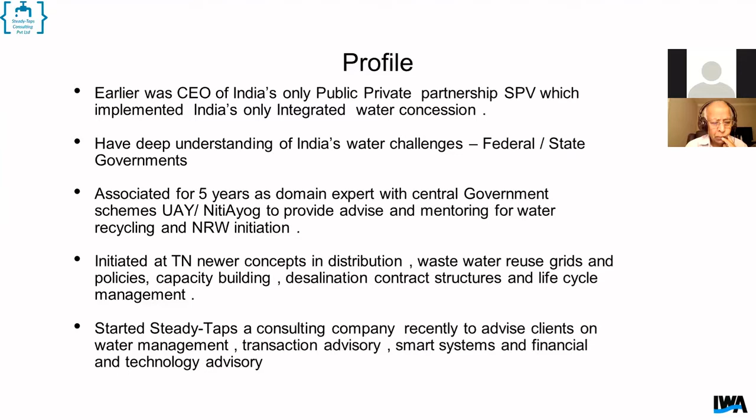I retired in the first week of July, and I've started my own small outfit, consulting with a few people. Especially, I consult with the Government of Orissa for all their reforms, and I work closely with them. Except that COVID has taken a dent on travel, they are marching towards continuous water supply, and it will be one of the first states to achieve it. I'm very actively involved with it.

The discussion points I want to put forward to the audience today: I want to talk about the challenges in India, the new initiatives of the federal government, that is the central government. I'm also part of some subcommittees, and I've been with NITI Aayog and UAY for the past 5 years, representing through IIT Madras the program on wastewater and air pollution. What has been India's experience over the last few years?

Key strategies and some case studies I'll be putting forward, from some of the projects I have been involved with right from the beginning, over the last 20 years. And how to bring in smart water technologies and new contract structures.

If you really see, sir, there is a real pressure today from the external environment on water supply. All of you agree to it. Today, quality and reliability has become a very big question mark. I'm not picking any states, but generally, sustainability is a problem. We are not having enough finance to take care of our future growth, conservation, cost effectiveness, and the social demands. The NGOs and other people have become so strong that they are all demanding.

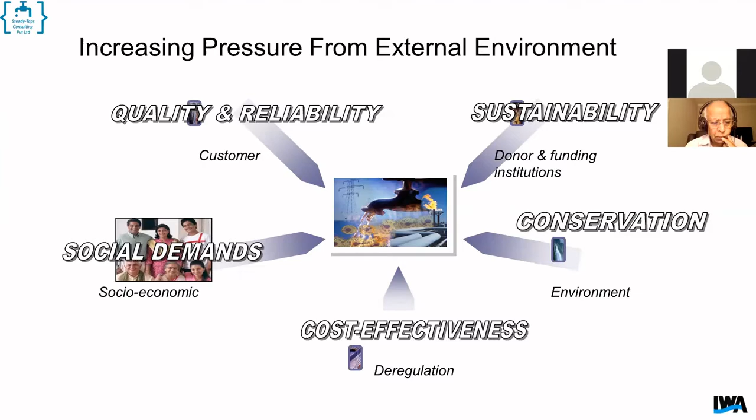So today the need of good city management is to really give 100% coverage of both quantity and quality of water supply, as per WHO standards, incorporating any of the water sources, like for example it could be ground or surface water. In the case of Chennai, it could be desalination or even recycled water, blended water also - it's possible.

In any part of the world, nobody understands that India is giving an average of 2 hours of water per day. It's all 24/7 at the consumer end elsewhere, and introduction of demand management measures, primarily through metering and other pressure reducing devices and things like that. And reuse of tertiary water for industrial and commercial parks and things like that.

In terms of sewerage, 100% collection and treatment is what is envisaged as per the MOUD guidelines, and automation of the pumping stations and other things. And of course ICT, what you call information and communication technology, has become very, very important. That is coming in as the bridge which will integrate the technical planning and the commercial function to give a holistic solution. And this is the purpose of any city management.

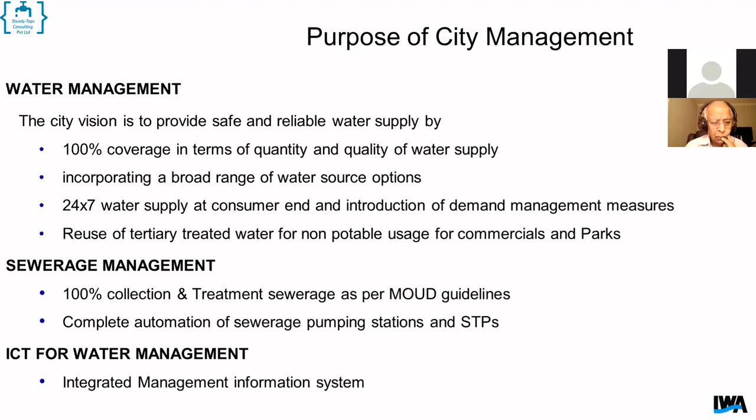Unfortunately in India, every city of ours, the 100 large cities or 100 smart cities, are very, very far away from it. So if you really see the utility perspective, water distribution is not equitable. I think all of us, whether in Chennai or any part of India, have this problem. Bulk water production assets have outlived their age. Distribution infrastructure is very old.

We take a backseat with regard to this oversized network. We are very keen to put very high capex assets by putting a water treatment plant for taking the capacity for the next 100 years, for the ultimate period, or even 40 years to the ultimate period, but we don't attend to the distribution lines - oversized networks, facilitating entry of sewer into the distribution system.

Our sewer network runs below the water networks, and very often there is penetration of sewer due to the air gap which is found. And because of the intermittent supply that we do, it is like sucking the sewer water and poisoning the system very often in many of the cities.

Less than 5% of the Indian system is metered today. And NRW - non-revenue water - I'll come to it later, is unknown. Everybody talks, everybody publishes on websites, they say I'm at 30%, 25%. CPHEEO norm says 15%, but no one is anywhere close to it.

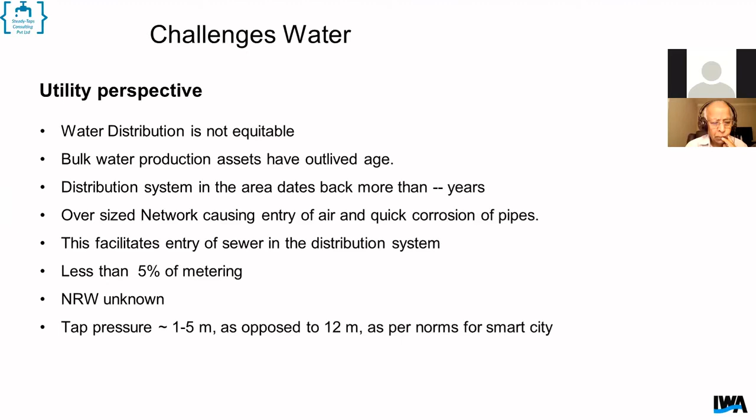From the consumer perspective, people know that they get only 2 to 5 hours of water. They in fact store the water. Due to inadequate water pressure, people resort to hand pumps, boosting the water, stealing it from the neighbors and things like that. Very many cities in India do that.

And the old water concept prevails. Whatever they store today, they are not sure whether the water is going to come next day. And when the water comes, they throw the old water out, and that is also NRW. And very badly, water contamination, especially due to rusted pipes and leaking joints, is very high. Consumers today have lost confidence - all of us take only mineral water.

Even though municipalities, and I would say even the mineral water people, are no good in terms of supplying the quality of water, we are forced to it because of the perceptions that have been created. So this is something very, very important.

The critical perspectives are source constraints, large distribution zones. We have expanded our command areas in cities in a big way. Cities have expanded, cities have outgrown, they have all added up. Chennai, from 174 square kilometers, has now come up to about 426 square kilometers in the last 5 years. So the geographical area increases with the same resources, and it is very difficult to maintain the pressure at the tail ends. Leaks and bursts, old dilapidated conditions of the pipeline.

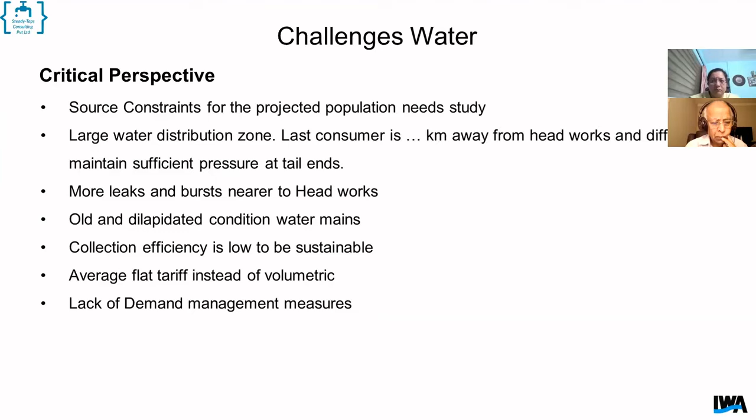Collection efficiency, I don't have to talk, it is very poor and not sustainable. Probably Tamil Nadu, Karnataka might have a better collection efficiency, but looking at the base of unmetered supply or unaccounted supply, it will be very, very large. So I would say the efficiency is extremely poor, average flat tariff and lack of demand management measures.

If you really see our legacy system, our baselines are very weak. Only now am I seeing a lot of smart young people coming from various engineering colleges, strong in the areas of GIS mapping, ability to understand technology and integrate them. Our records of baseline are extremely weak.

So we become very vulnerable, and we are always considered a high risk country because our baselines are never clear. Use of district metering, DMAs are never found, PRVs in very few places, and water audit or water balancing is almost non-existent. It's more than water audit - water balancing on a dynamic way is non-existent in our country. Per capita supply is low, poor pressures, and NRW is more than 50%.

I'll come to it shortly. And the cost recovery, all of us know. With the result, water supply is intermittent and inconsistent, tanker mafia in many cities, including capital cities like Delhi and Chennai, have all resorted to this.

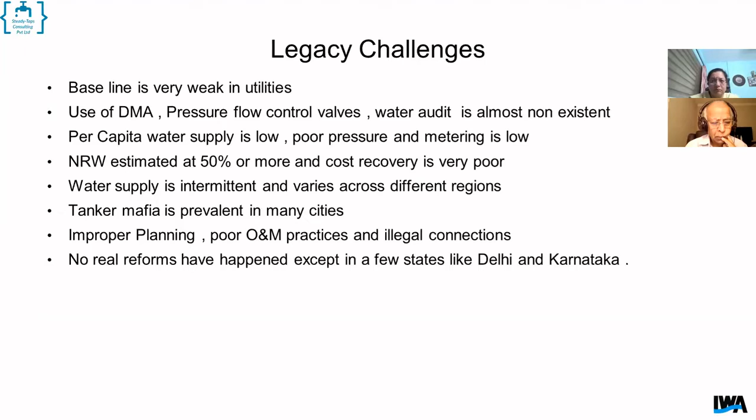Improper planning and poor O&M practice. No real reform has really happened in this sector. Only states like Karnataka and to some extent Delhi have done this, and every other state lags behind. Even many of our neighbors in Asian countries - especially Phnom Penh, Cambodia, Vietnam, even Sri Lanka - are far ahead of us in continuous water supply and NRW management.

So why am I saying this is very important, sir? We are coming close to the closure of our lockdown period in Tamil Nadu, but the challenges are going to be very high for our urban local bodies and government bodies, because it is very clear that clean supply of water is the front line of defense. The ubiquitous water supply is the front line of defense.

Hand washing - even today, you might not believe it, with so many sanitizers available, but all of us believe in disinfecting, washing our hands and feet even before we get into the house. That is very important, and we can't use stale water. Reliable piped water supply to consumers today is a prerequisite for social distancing and quarantine strategies.

Many people with COVID are staying inside today in many houses. In Chennai itself, I know so many friends who are COVID positive staying within their houses, not in hospitals. The prerequisite for them is reliable piped water supply. And the reliability and quality, whichever city in India, is still a problem.

Infrastructure spending post-pandemic will become very difficult. And like what Tamil Nadu has done, skilling and capacity building is going to be a very major thing. That is what I find - people like Dr. Nupur and others are doing so much work through TERI and other institutions in Delhi in terms of skilling and capacity building. This needs to be done at the distribution level also, sir.

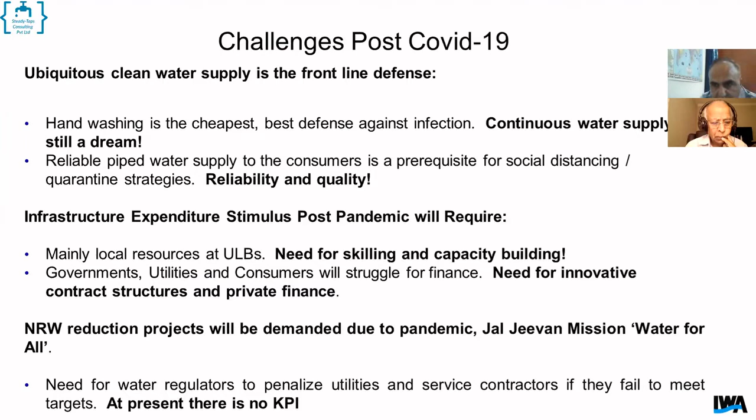The unique challenge in India, sir, is that we tend to operate our wastewater plants as water reclamation plants. We have learned this from the Singaporeans and others, and we are trying to build world-class systems on the wastewater side, especially after the new CPCB discharge norms. We are getting more modernized and talking this language of using wastewater as reclamation grounds or water factories. But we should also run our basic utility operations properly. That is actually the real bloodline for the citizens and for the utility themselves.

Today, unfortunately, utilities don't really exist as they should. The knowledge is there with the plumbers, fitters and linemen, but many have long retired, so we don't always know how current operations actually happen. Operating cost recovery is low, supply is often intermittent, and commercial and staff efficiency is also pretty low.

So if you really want to invest, if the World Bank wants to come and invest, it is very easy for them to fund a desal plant or a wastewater treatment plant. They are not able to invest in distribution, which is most important for our cities. Why not? Because asset condition is not known. There are no consultants able to deliver the quality of consultancy reports or DPRs that stand on their own, matching exactly what the asset condition is when the contractor comes in for construction.

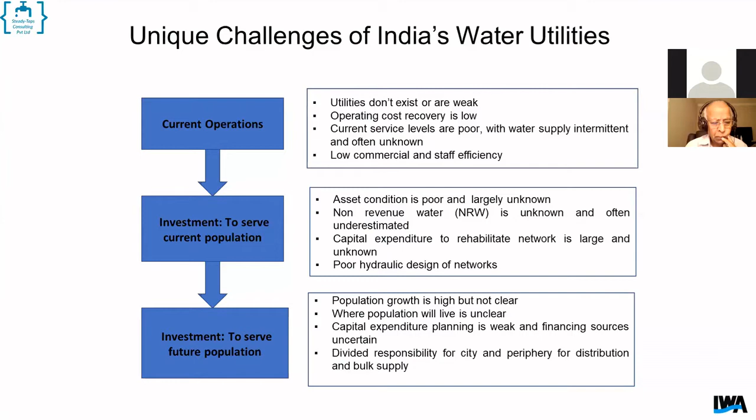Population growth is high, but it's not clear where the population will reside - whether in the ECR area of Tamil Nadu, Chennai, where there is no network right now, or in other newer areas north of Chennai. We do not know. Where the population will live is unclear. Capital expenditure planning is weak, and with divided responsibility, because cities have become so large and unviable, it has become very difficult.

So this is one of the things, whatever small, it's easy to handle.

We did a freewheeling thinking some time back, and a new guideline is expected to come. An apex level committee has been formed under CPHEEO, sir, just now, and they are coming out with this, wanting to bring in incentives also, I feel, so that they cover in the new Jal Jeevan for urban: 100% population and a piped water supply is the mission.

Just imagine, today we are just about 30 or 35% in our sewer system, whole country average. As such, we are having so much pollution issues, so much ingression into water networks of wastewater. Just imagine if we were to sewer the whole country, what will happen? If this type of poor workmanship happens, it will be a time bomb on us.

So we need to take a call now very clearly, and that is why pressurized piped water supply is very important. Quality up to WHO standards, and it should all be talked with respect to the individual houses or consumers, and conversion from intermittent supply to continuous supply, performance-based deliverables, and slightly long-term cost recovery.

Even in smart city, the government has given a ruling saying that when the central government gives the funds, within 5 years you have to be sustainable in your O&M. That means your tariff and efficiency of operation should be such that within 5 years, your solid waste or water network or O&M of anything should be paying for itself and sustaining and growing. That is why they provided the core capital. And we are today very far away from it.

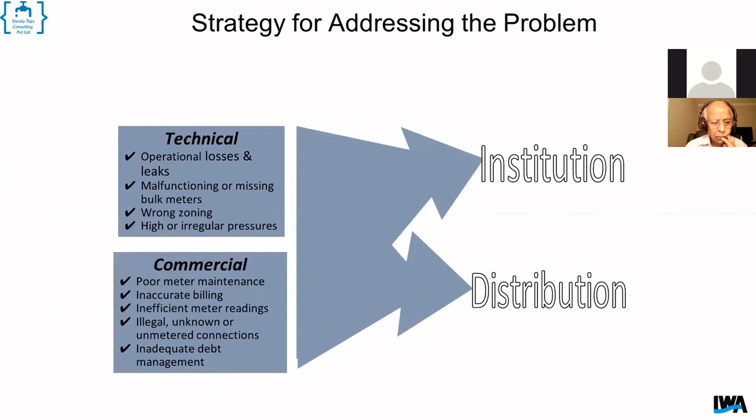Similarly, the main principle should be to provide sufficient, optimized, pressurized water. So we should have an appropriate legal and tariff framework. Consumer awareness is important - provision of billing, customer services, efficient O&M, institutional strengthening, state-of-the-art information technology.

Indians, we are very good in that, and we actually do most of these things for around the world. In fact, most of the London utilities' back offices are all managed by people like Wipro. Do you know that?

All the systems that are done, there are Swan systems, companies around the world with intelligent network systems, which are all manned by our IT companies in India, whether it's Infosys or Wipro, all doing it from Bangalore. Effective utility management, cost benefits, and sustainable methodology is very important.

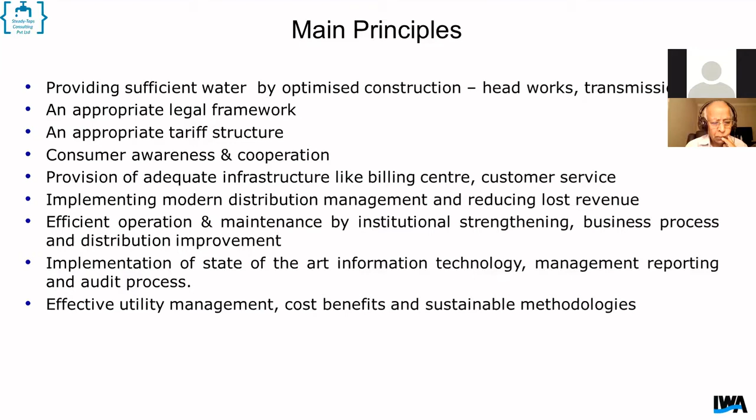So the methodology is not rocket science. It is not like what you typically see in a treatment plant where you need to know the hydraulic flow and do so much of things. These are absolutely simple. That is why places like Manila, Philippines, Malaysia, Thailand, and Cambodia have taken it on so well.

You might say they had sources of water, but we also have sources of water. It's how you manage that properly. So the hydraulic network, piloting is very important: rehabilitation of distribution mains, house service connections, metering, water management, public fountains, making it accountable by metering, improved CRM, SCADA, and active leakage programs.

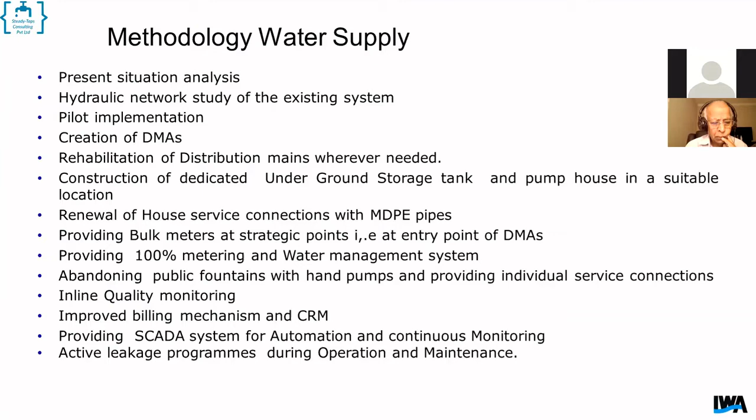This is what is not happening in India. We need to have a proactive O&M management, which is very important.

So in any city, it's like if L&T were to enter a market, say, how do they go into Hubli Dharwad? They did a study, they did the O&M when I was the consultant of Hubli Dharwad about 15 years back. They entered into a small O&M service contract of Hubli Dharwad with about 100 people manning the headworks. They learned it slowly, then understood what was the current condition and what was the desired condition to achieve.

And today, they have taken such a massive order of 4 large cities in one stroke, because they had superior knowledge and were able to give a solution which could achieve, or go near, the desired condition of what the utility wants in the best possible roadmap.

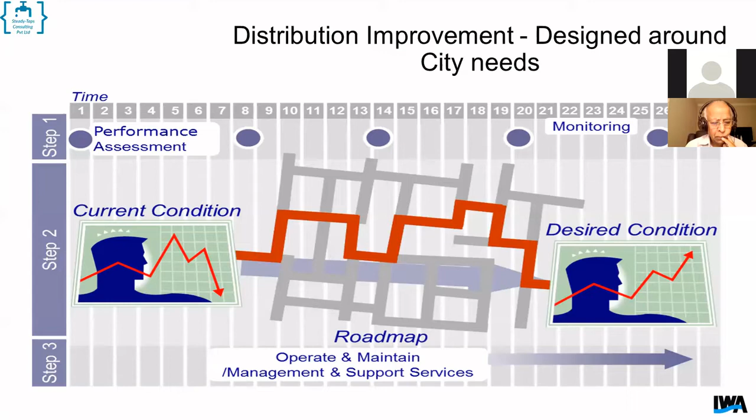And normally these projects are 10, 15 years. Even to do the study takes about a year's time. And any rehabilitation takes at least 28 to 36 months in this area.

So it's very important to really quantify the lost revenues. For example, revenues can be leaking due to technical reasons also - poor hydraulic pressures, wrong zoning, non-visible leaks which are happening, background leaks which we do not know, and commercial losses in plenty.

I don't have to tell you, most cities are not metered except Karnataka and Delhi possibly, and some parts of Hyderabad and other places. But inaccuracy is very abundant - illegal, unknown connections, inadequate debt management is a very big thing.

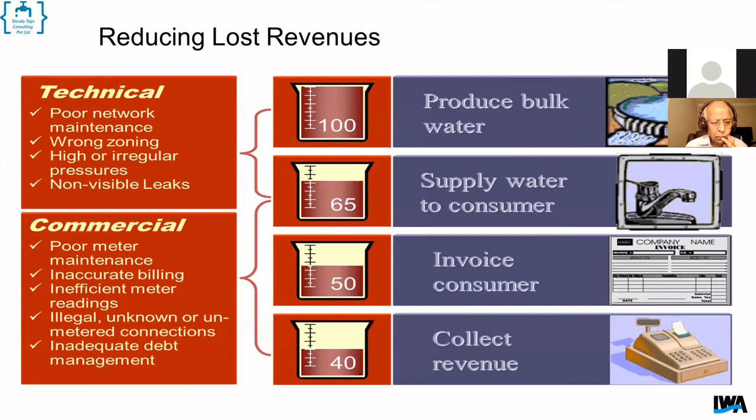So this is the water table, sir, which was actually brought in by a friend of ours in IWA. He's one of our founder members, sir, Professor Mohan, called Roland Liemberger. He actually brought out this water table for the World Bank EasyCalc. And last week this has got updated, sir.

They have brought in the smart system and it has been widely circulated. In fact, I have sent it to the entire committee members of CPHEO to try it out, to find if there are any bugs in it.

It is like a profit and loss account of any business operation. You have the authorized consumption, billed authorized, unbilled authorized, and the water losses can be divided into apparent losses or real losses. Real losses are the leaks, overflows, and apparent losses are all your commercial things. Then you zero in on how you can retrieve and lower these losses through some of these interventions.

And this table has got updated recently, last week, and I can circulate it to all of you through Mr. Jayan shortly. I'm sure you would have got that directly, the messages from the IWA. But this is something they have put together and they want to launch it on World Water Loss Day now.

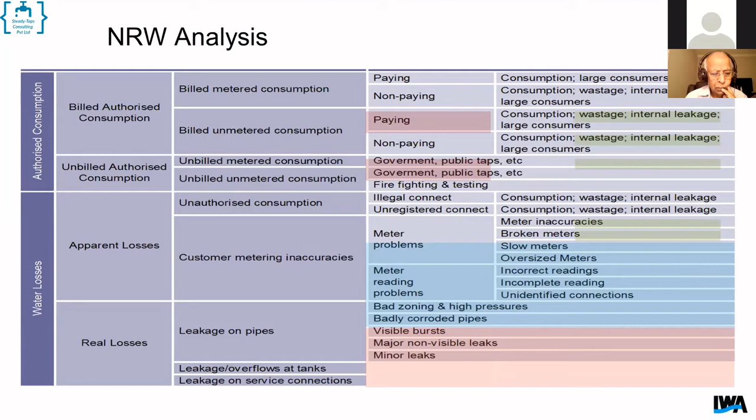What is non-revenue water loss, sir? We talk about it, but it is not actually taught in our schools. Basically, it's the volume of water put into the water distribution system versus what is billed to the consumers.

So if you see, it consists of three components: physical or real losses due to leakages, commercial apparent losses, and unbilled authorized consumption.

The real losses are comprise leakages from all parts of the system, like transmission leaks, distribution mains, service connections, which are the most vulnerable areas. These are caused by poor operations and maintenance, lack of active leakage control, and poor quality of underground assets.

Today, there are no systems to map our underground assets. And we are bringing out large tenders saying replace the whole stretch of pipelines in streets. This is because we don't have these underground investigation systems. I will share a few case studies on what I've done over the years.

Apparent losses are caused by meter under-registration. And even though we might not have meters, our data handling leaves a lot of errors, and theft is also a big problem. Unbilled authorized consumption includes operational purpose water for firefighting.

As per CPHEO standards, we are supposed to provide for firefighting demand. Unfortunately, many cities are not provided with this, and water provided for free to certain consumers also needs to be taken into account.

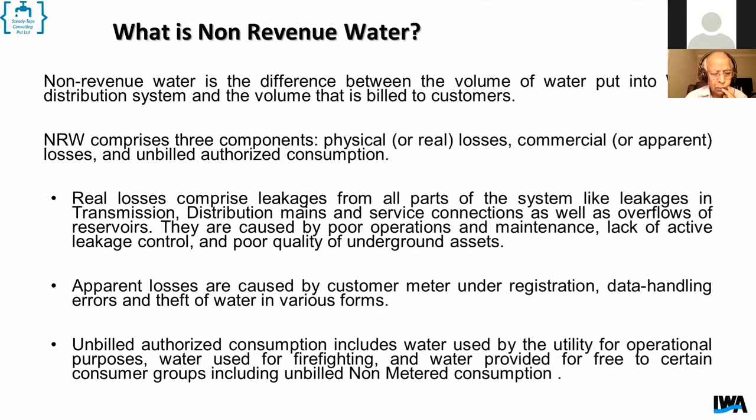Your NRW is actually the efficiency part of the commercial operations of your utility: water produced minus water paid for. Suppose you see the websites of almost all the utilities or ULBs in India, they'll all claim UFW as 30%.

This is a correlation worked out by a friend called Dr. Dinos from Hydrocom over the years, and it's practiced as a crude methodology in any of the systems when people go for bidding for these types of contracts.

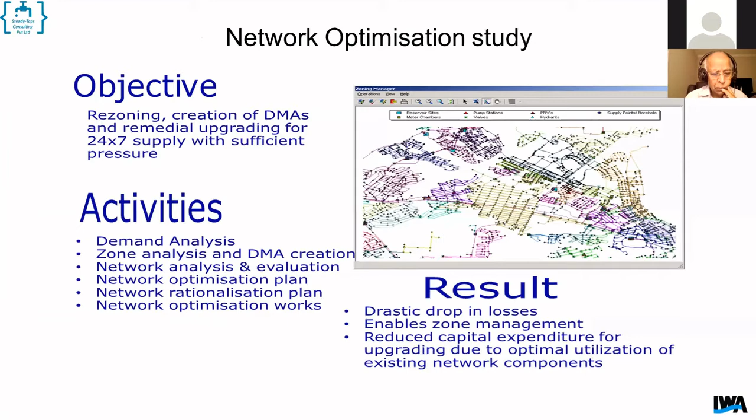So typically, you need to do a very good network optimization study. We need to rezone, whether it's a green field or a brown field—demand analysis, network analysis, rationalization—and only then do you come to zone management and decide what capital needs to be invested. That is what people are doing in Coimbatore, or for example in Hubli-Dharwad.

L&T will come forward with an action plan in terms of a capex plan. They are given the boundaries in the tender, and they'll say, if you are giving me 300 crores for the development of the city, this is where I'll put it—wherever the ROI, return on investment, is there. Not just laying pipelines wherever we want.

It is not like building huge capacity water treatment plants which will never be used in the next 100 years, but to use it rightly, because you should have a payback period within 5 years.

Anything should have ROI. So you do fixing of leaks, valve rehabilitations, PRV valves, chamber rehabilitations, replace house service connections which are very vulnerable points, and then if required, you go in for metering.

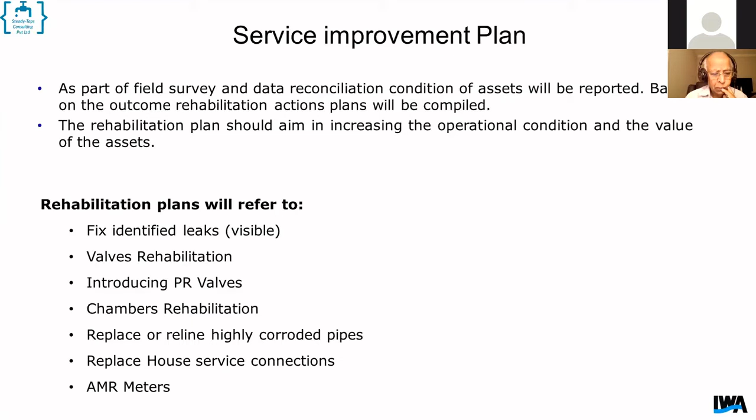For all these things, you need to measure, control, and monitor. And you need to understand that you need to use a lot of ICT—smart water, digital water.

I feel India has got an enormous opportunity, sir, because all our IT companies have been doing this for many years—they are the ones running the London utility or Thames Water back-end. Today we have this opportunity. We don't have the domain expertise probably in that area, but today we have all the skill sets.

And this is what will take us to the next leapfrog into a next league in water management. That is where I see ICT playing a very important role. I myself specialize in this area a lot, and that is why India will be a global supplier.

This is one of the sectors where the Indian government will be very proud—we can make everything 'make in India' and 'made in India'. This is the only thing where you can do it; you can't do it in desalination, you are still dependent on high pressure pumps from outside.

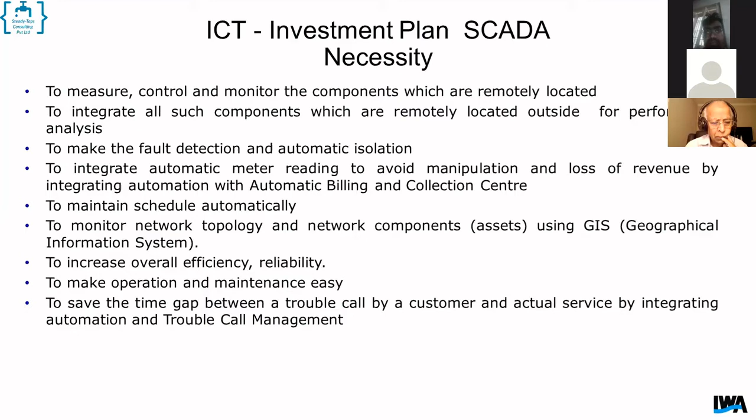You can't get beyond a certain diameter of HDPE pipes manufactured in India, so we have to import. Not here—everything could be done from India, as made in India. And that is what I say, ICT will become a very, very important concept.

And these are all not rocket science. All these things are divided into processes of enabling demand management, work order management, maintenance management, asset register, demand analysis, design standards evaluation, and everything can be done.

Like people, I believe L&T is coming out with an integrated management information system. I used to be a very big patron for integrated management. Centrally, you can actually marry your commercial database with your technical, your hydraulics part of it, and dynamically do these things. And that is what we need to do in India.

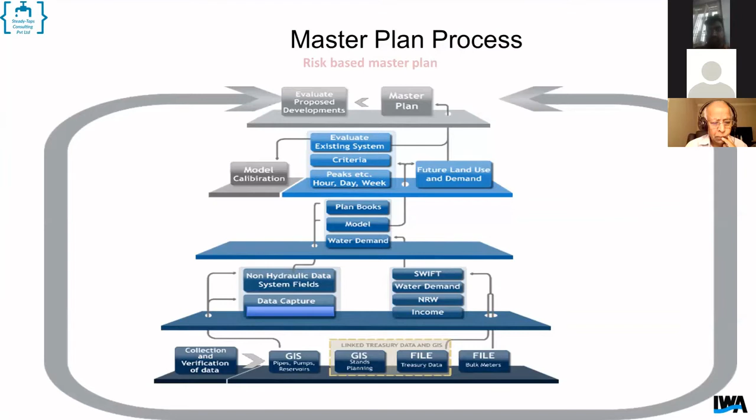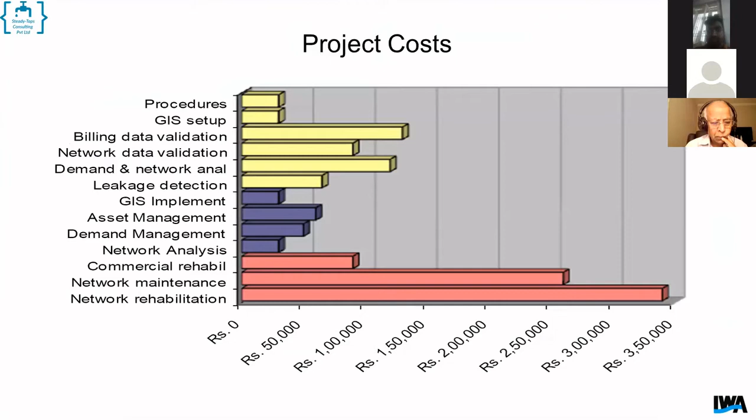So you need to actually go deeply into this dynamic master planning so that you allocate costs in terms of all these functionalities - GIS, billing system, asset management - you quantify the cost for each one of them. And then you also work out what could be the expected revenue.

For example, Orissa went on a 2 lakh metering opportunity very recently. They floated a tender and had a lot of struggle to finalize it - 3 times there were writ petitions, 3 times the tenders got cancelled. Finally, they got it right by actually going in for the metering part of it. Very important - they want to have control on the demand first, and then they said they will do the other things shortly.

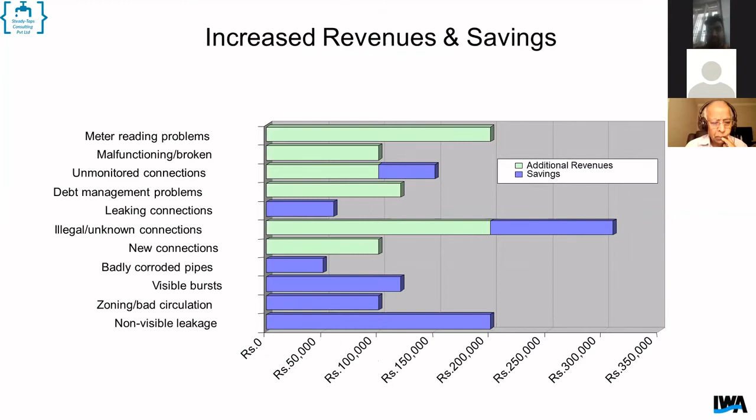So what I'm saying is everything that we do in water can bring in additional revenues or even savings in cost, and this has to be run like that. So what we need to do is all these monolithic ULBs or water boards have to run it as a utility service provider. They should not be run like boards - they should be run like utility service providers.

They are meant to be the face of the consumers in terms of giving them service. So the commercial department, O&M, design, corporate, and all these things have to be integrated into an institutional mechanism of people, process, information system with an SOP.

So we need to do the planning function in terms of demand forecasting. Everything is happening dynamically - Chennai, for example, or even Bangalore or Delhi is growing at such a rapid pace. And unless we marry the distribution and the institution, the real effective utility management doesn't happen.

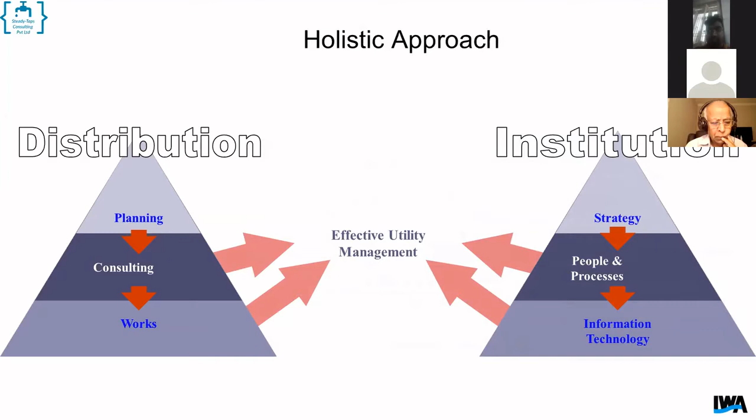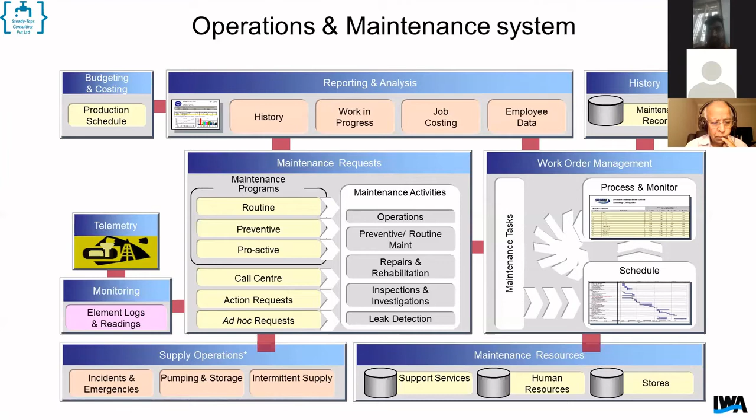Similarly, reduction of water NRW - first of all, you should have your GIS base maps very clearly of your distribution network or even your other assets. And we need to capture this data and actually run this system.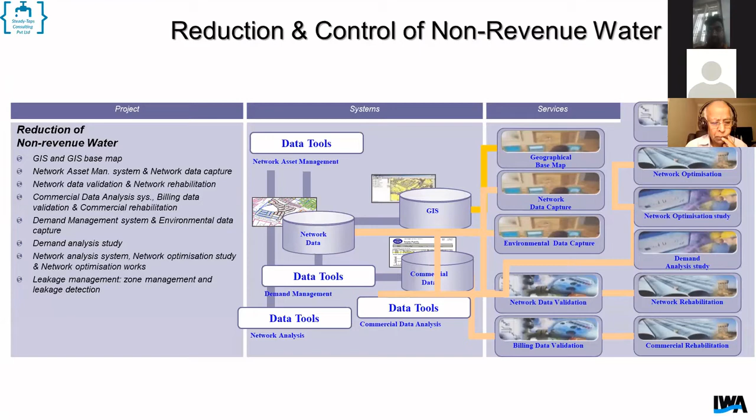Very few cities have got this. I know Bangalore has got it, Delhi has got it, Chennai has got it, but very few cities are using it to the full potential that they have in terms of what they need to do for network optimization and leakage management.

In India, the biggest contributors of this NRW are pipe bursts, metering errors, overflows, and illegal connections. So what we are saying is that you should go into the concept of DMA - this is what is being done world over.

DMA is nothing but a district metered area, a hydraulically separate area with one metered inlet. So if you have about 5,000 connections in a particular zone with a command, what you call an overhead reservoir or reservoir coming from another area.

That is enough so that you can handle a smaller area better than that. And then you have permanently closed boundaries so that you keep the water within itself, within that boundary. This is how it works.

It's called DMA1, DMA2. For example, you are forming a hydraulically discrete area, and that is the concept being done. Unfortunately, in none of our cities has this concept been introduced. Only in the 12 cases which I discussed, these have been introduced.

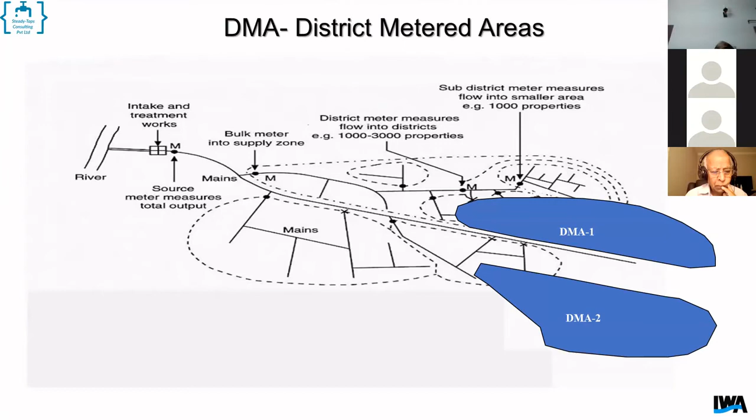Like in Karnataka, in Bangalore, it has been introduced. In Delhi, it has been partially introduced. But that is why we are not able to manage any of our zones. We are not able to give water to the public. We are not able to give equitable water supply. We are not able to manage our pressures. We are not able to do proactive leakage management due to these problems.

So in a DMA area, you'll have boundary valves, circulating valves, sluice valves, and each one has a way in which it operates. And the methodology, this is not rocket science. Today, all the systems in Manila are run by non-engineers. They do a fantastic job.

They get awarded for outstanding work in the way they manage the system. A city with 2 crore population is giving 24/7 water. They have taken a concession from the government of Philippines, and they are a very, very profitable company on the stock exchange. They pay some 20-30% royalty per year and still have enough profits left because they manage the water well, and the account for each and every little droplet of water is quantifiable. So that is how they run it.

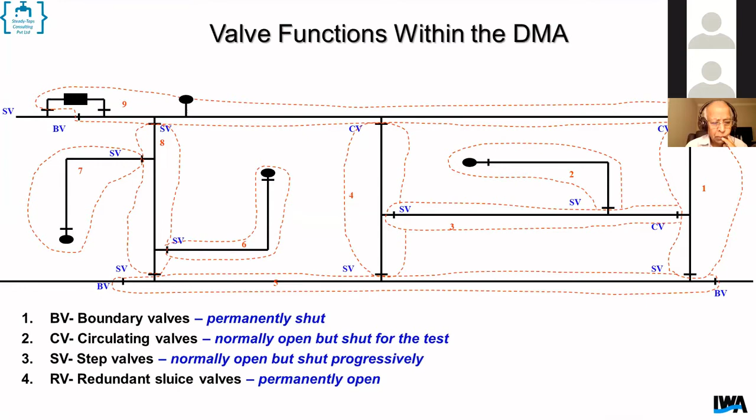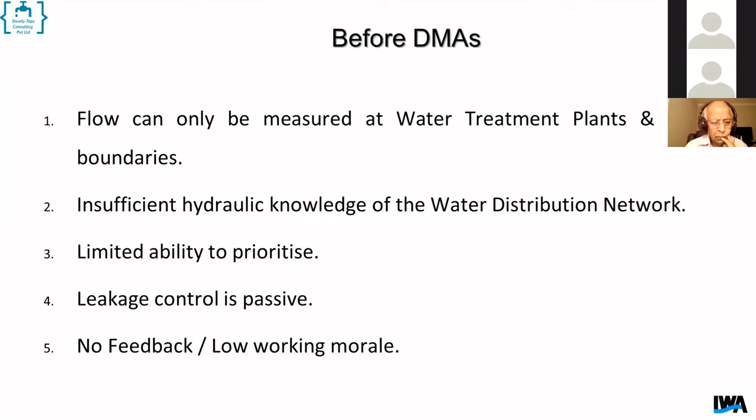So if you really see, before the DMA, you have insufficient hydraulic knowledge. Today, we don't have knowledge of our water distribution network. We are not able to do prioritization, and leakage control is only passive. Whatever we see as visible leakage, or if a corporator says, what you are doing, there's water flowing, so many gallons of water flowing, then it is attended to. But it's a very reactive thing.

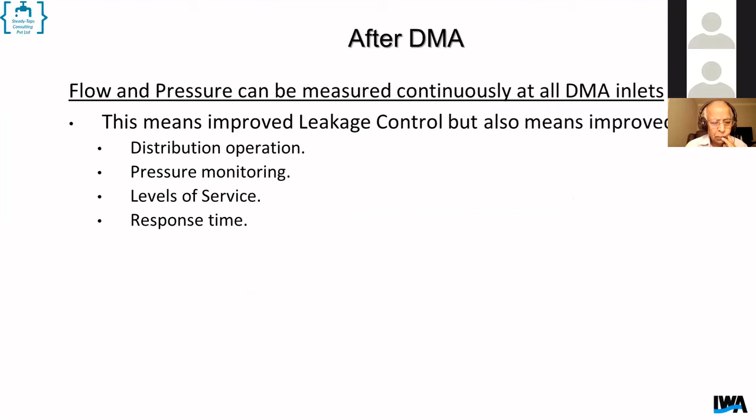But in the case of a DMA, the system will take care of the whole thing if properly designed. And pressure monitoring, levels of service, and response time can all be seen. So there are various techniques in this which are being worked on. Some of them work in India, some of them don't work in India.

But I feel in India, in future, we have to go only for a pressurized system, and that will only give customer satisfaction. It will give clean water. Whichever water is pressurized, there is less contamination in the water. If you supply intermittent water, it collects all the residue and flushes it. It's like a flushing machine at that time, where it is giving all the bad water to the public.

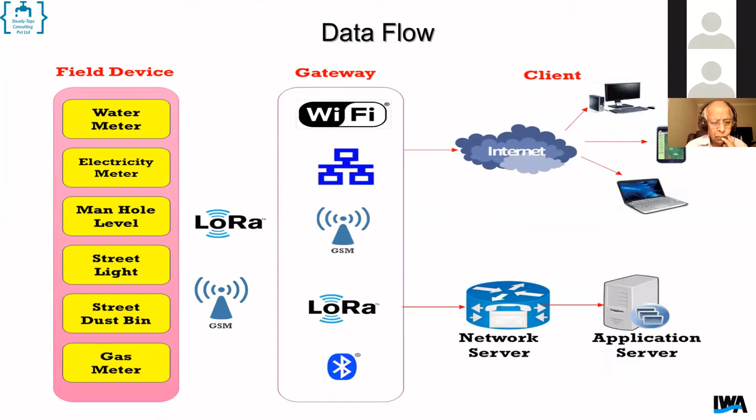So you need to do good supply management in terms of IT. We don't have to explain it much. All these networks are there in terms of LoRa technology, internet. Even your sewer manholes could be taken care of in terms of surveillance and things like that. All these things are available. There is an abundance of startup companies in India for this, which we can use.

So it should be a centralized operation. I was trained in Berlin about 10 years back in water management, and the whole city of Berlin—such a huge city, 3 or 4 times the size of Chennai, almost 1,000 square kilometers. They might not have our population, but they are controlled only with a central control station with flow meters. They can map the whole city, everything. And today, people are doing this.

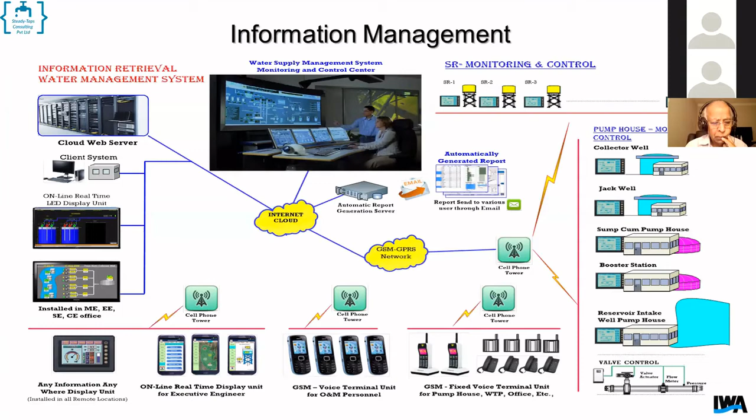There are companies around the world which specialize in these types of technologies. And in India, it's very easy to replicate. Some of our smart cities have started doing it. I think full citywide implementation should come.

So it's very important to have a KPI. We should definitely supply all the consumers with piped water. Very important: 150 LPCD minimum, that is what is as per the norms. But all the big cities in the world like Paris or London are running at 110 or 100 LPCD and still supplying 24/7 pressurized water because they manage the water supply system in such a way.

Extent of non-revenue loss—I say you don't even have to go up to 15%, at least a 20% benchmark from whatever we have, 50 or 60% right now. Cost recovery should happen. As I said, at least the water supply services should recover within 10-15 years. These are the type of projects one needs to get into, and efficiency is very important.

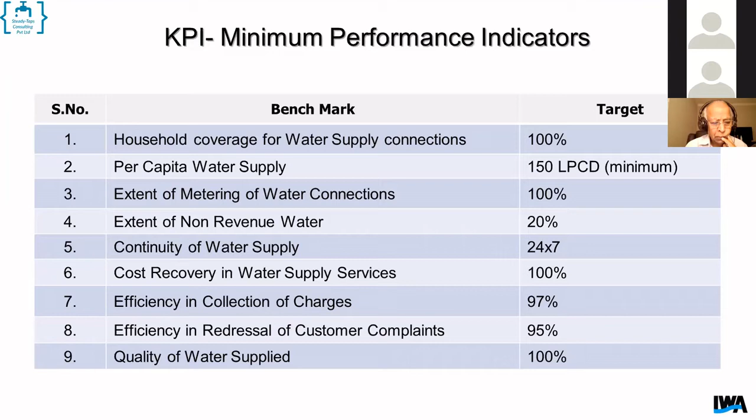And the quality, there should not be any compromise. So one of the key things in this is if you want to produce continuous water supply, you need to build a utility. You need to build a water factory. It is not about just taking so much intake water and supplying, with the rest being the problem of the people in the field or the consumers. It is not like that. You have to run it like a well, from source to tap. You have to run it like a utility.

That is what is important. You have to tolerate some cost uncertainties, very important. That's why I'm coming out with a model towards the end, which I've given to the Government of India also, to try and accommodate it.

Boost information accountability and take care of the urbanization that is happening. All our cities are getting very, very big, urbanized. Urbanization is the new growth trend, especially in our state, where urbanization is almost up to 40% now. And sustainable finance as such should be there. You can't expect government only to invest. All these projects lend themselves to the green economy very well. We are reducing carbon, we're reducing the energy part of it. Leakages indirectly, if you reduce energy loss, energy reduction. So these lend themselves to good financial norms.

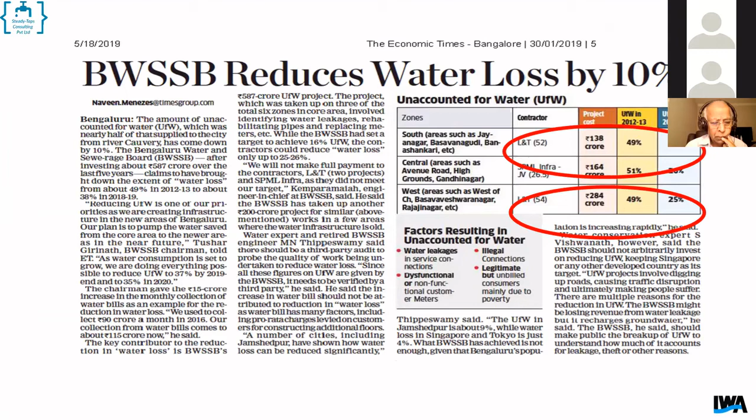I will briefly come into some of the case studies. I don't have to tell - BWSSB, Mr. Jagannathan is already there, and one of his colleagues had also presented it last time. This is one of the best projects over the last 10 years.

Bangalore has tried it. They tried the conventional methodology of meeting future demand with a finite source. They bring water from Cauvery in 4-stage pumping. It's a very difficult thing, and they spend a lot of energy cost on it. UFW reduction is what they have tried to do. They have achieved up to 25%, even though the targets were about 16%, which will be very difficult to meet. O&M delivery, safe clean water, and it has been acclaimed that there is an increase in revenue in this project. This is a real showcase of a project with international practice coming in.

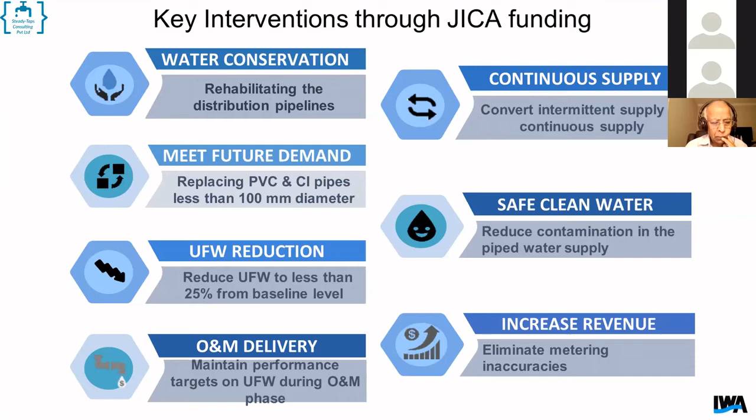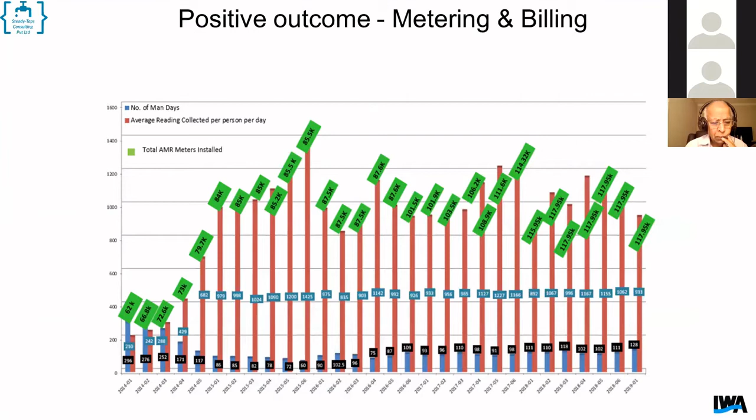But now the newer models which will come in will be slightly better than these models, which I will share with you later. Delhi again had this big metering program. In 2015 they started - if you see the chart, 2014, 15, and went up really - the billing, average billing, everything went up. But today it has taken a backseat. But a wonderful job was done in those days by L&T to really bring in these things and do it.

One of the successful, or a shining example for us today, is Nagpur, sir. Nagpur is a city of 30 lakh population, and today I told you about almost 200 MLD has been converted out of 571. Half the city has been converted to 24/7. So improving coverage was one of the basic objectives, benefits to the poor, quality and health, no water contamination, service level improvement.

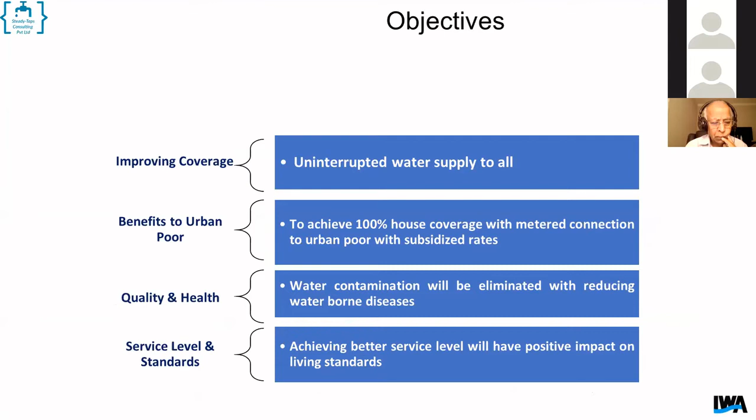What they did was very similar to - they formed a step-down company. They brought in the administrative and political reforms. They structured it on a PPP principle, which I also hold very well, that it is possible to come out. If the player can come out with a very low investment or no investment, he can even raise the money after he gets the order, so that this can be brought in. And this is one of the classic examples.

They did everything, but they didn't have a bed of roses the last 5-7 years. There have been marginal improvements in the technical efficiency and commercial efficiency, but they're having a huge problem of some inability to put metering. They're having huge resistance. This was a global tender for 25 years. It was bid on the volume billed, and it was based on technical and commercial criteria, and the provision of escalation was very limited. So they also were caught like what JUSCO was caught in Mysore.

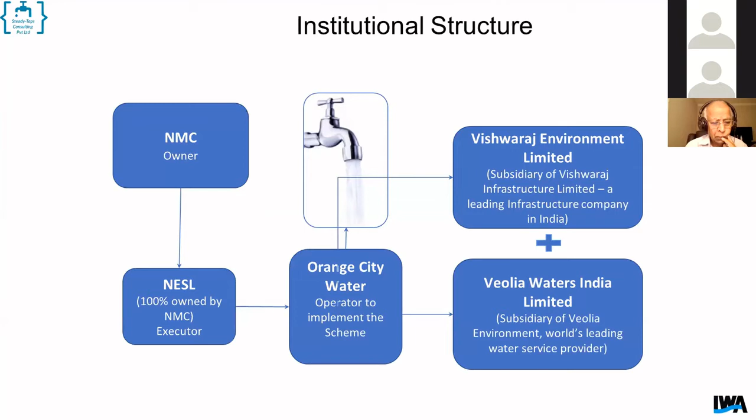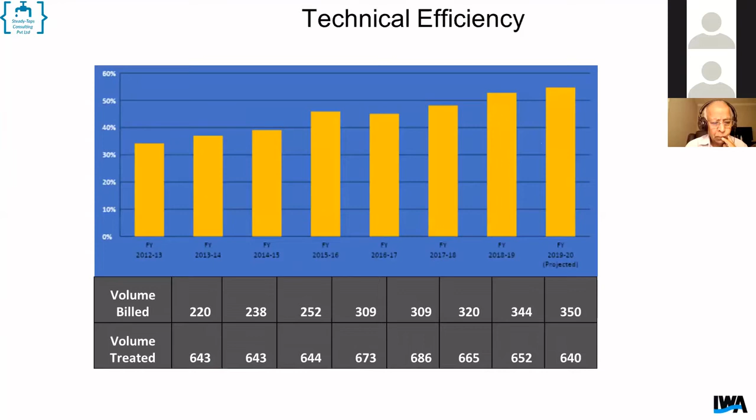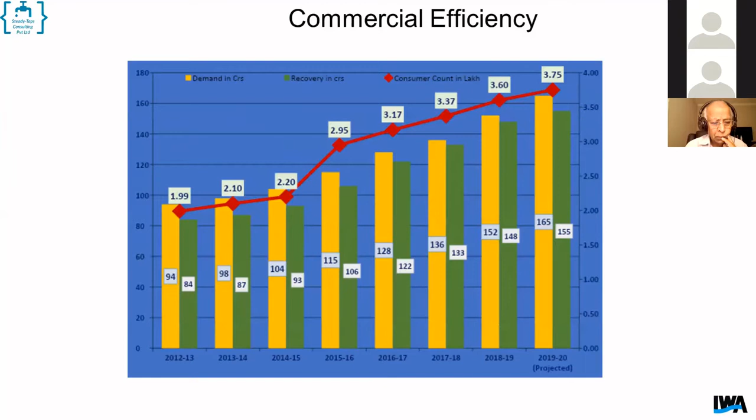And the commercial efficiencies, recoveries, demands have all gone up. This is a very significant thing. These are figures of 2019-20, all gone up. Similarly, if you see—I might be having an older slide—at least 141 MLD, the billed volume, the reduction of NRW has been from 64% to 30%.

This is the command area, and it was a huge city. It was not possible to do everything together, and there were too many resistances. So they actually did a Pareto analysis of what with metering, without metering.

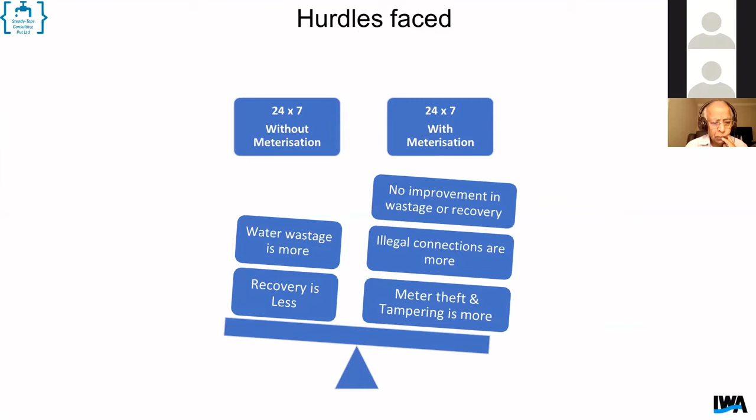Without metering, there has been wastage of water, and the recovery will be less. With metering, of course, they're able to find out who are the illegal connections, even though they are not able to regularize them. At least they are able to quantify that, and there is no wastage. There's no improvement in wastage or recovery, and metering theft is more. That shows people are playing with the meters because they are trying to reduce the consumptions, and demand practices will automatically come in, like what happened in Hubli Dharwad by Veolia.

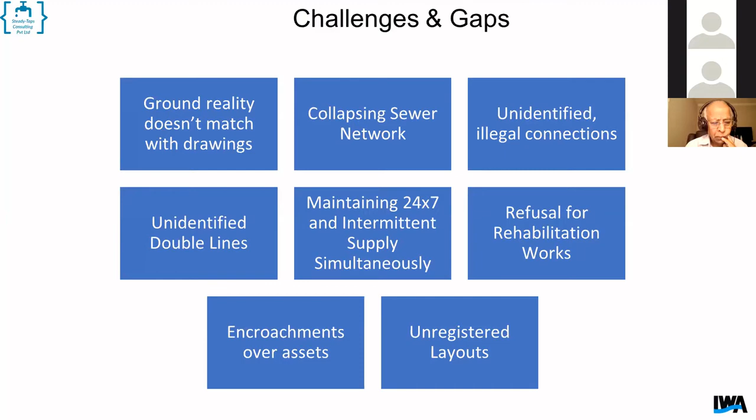I've done a lot of work in Tamil Nadu over the years. In my tenure at TWIC, I almost devoted myself to Tamil Nadu and Gujarat only. I would like to share some of my live cases. I see that there are participants like Mr. Muthu Mariyappan, who's been the former chief engineer of TWAD, very highly regarded. I saw his name in the participants list. I hold him with a very high reverence. I was fortunate enough to work with him in the initial study in some other areas of Ramanathapuram and Thoothukudi, but I worked throughout the state with my small team. I developed this company, TWIC, in urban water primarily with these motives.

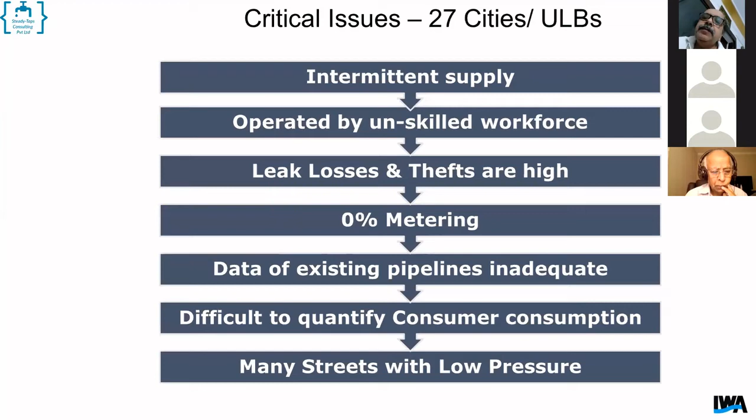What we found is—you don't have to take it hard—but generally service contracts have unskilled workforce, leak losses and thefts are high, zero metering, existing pipelines inadequate or the condition not clearly known, difficult to quantify consumer connections and consumptions, and many streets with low pressure. So the diagnosis was to find out what are the existing assets, what is the condition, what is the system input volume, what is the output measurement, and where is the water being lost.

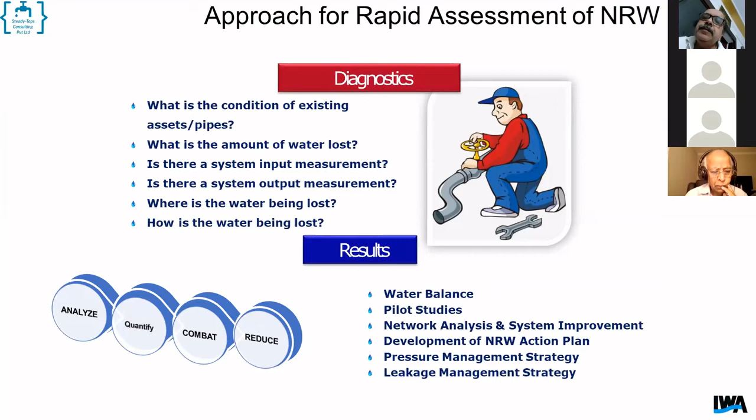I have done about 27 ULBs in the state, and water balancing pilot strategies were all done. This is a small example. I shared it in a forum with the principal secretary at the time, Mr. Phanindra Reddy, about 5 years back, showing how—taking only the secondary data from TWAD and Chennai Metro, only the urban areas. I'm not taking the rural area, I'm not even taking the extended area of Chennai—just got 7 million population. This is only 4.6 million population. You have a minimum average supply of about 2,700.

And if you take as per the secondary data, 15 and 35% as the losses, and if you apportion them in terms of physical and commercial losses, your total NRW per year is 2,70,520 million liters per year. And if you really see on a daily basis, if you had to convert it, it is something like 741 MLD.

If you really relate it to the cost of water—if you see that Chennai is subsidizing, because in Chennai we pay the lowest tariff, probably after Rajasthan, 45 rupees or something per flat connection—whereas in other markets, other ULBs in Tamil Nadu pay higher, as much as 90 rupees per month. And even if you say that industries cross-subsidize with the tariff, industries normally give about 120 rupees per kiloliter, but if you average out between small and big, it is about 40 rupees.

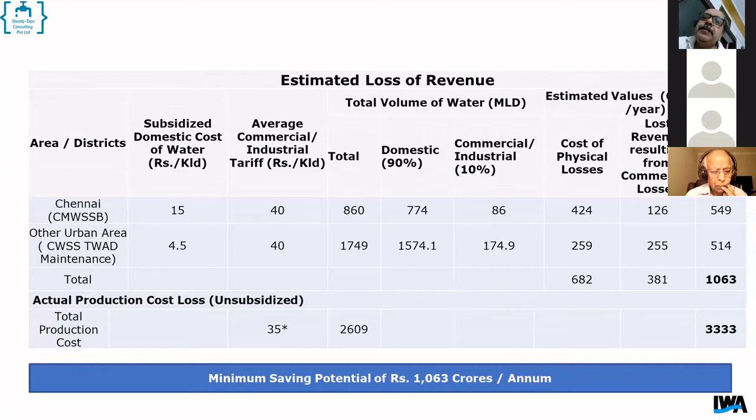And so if you say 35 rupees, for the same volume of water of 2609, you are saving as much as 1,063 crores per annum. So it is almost equivalent to putting this money back into the system instead of building a new WTP or trying to build a monstrous treatment plant and things like that. You can deliver service to the public with this money instead. That is what has to be done, in a smart, holistic way.

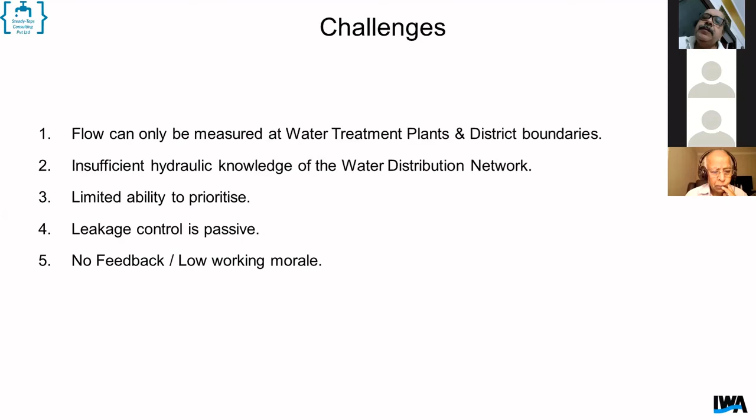Flow measurement faces insufficient hydraulic knowledge. Flow can be measured only at the water treatment plant, and even then district boundaries don't exist. The flow meters don't work, there's limited ability to prioritise, and leakage control is very passive with generally low morale.

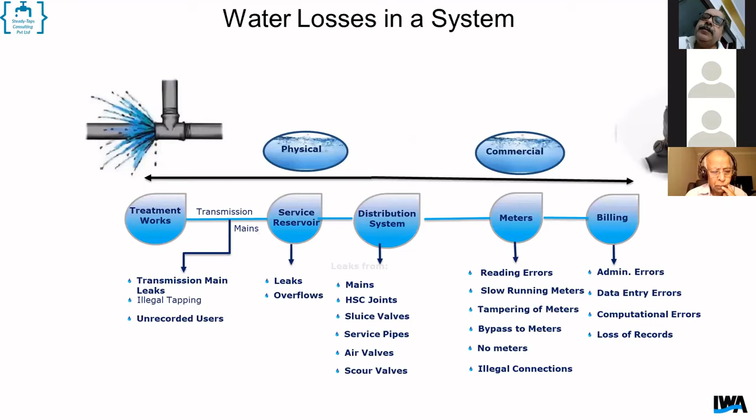So leaks are there across the system, whether physical leaks or commercial leaks. All these things are encompassed into this whole thing, and we try to do the DMA. Today places like Coimbatore, Tuticorin, and Tirupur are becoming model cities because of industrialization. Tirupur contributes 40,000 crores to the exchequer.

They say very clearly world over, wherever there is Lakshmi, there is good water. Water is the baseline. We put our project called New Tirupur Area Development Corporation when Tirupur was getting water once in 15 days by tanker - we started this project 20 years back. Mr. Jagannathan worked on the project, and we brought daily water supply to the town of 5 lakh population and to the industries, the dyeing units, which brought in the economy of the state. Today it contributes 40,000 crores to the exchequer.

So the GDP of a country or state - look at examples like Singapore. New water, the recycled water, what they call used water, has got a premium over surface water. In fact all the MRO industries, the big precision manufacturers, the chip manufacturers who want to set up shop demand that water only at a premium. So that is what they have brought in.

This is all done through good district metering and design criteria, looking at it as a very important resource and making each and every drop of water accountable. The DMA design - I don't have to tell all of you, you know it well, but world over, in fact today afternoon I was in a few international webinars, I can tell you we are very, very primitive in this area.

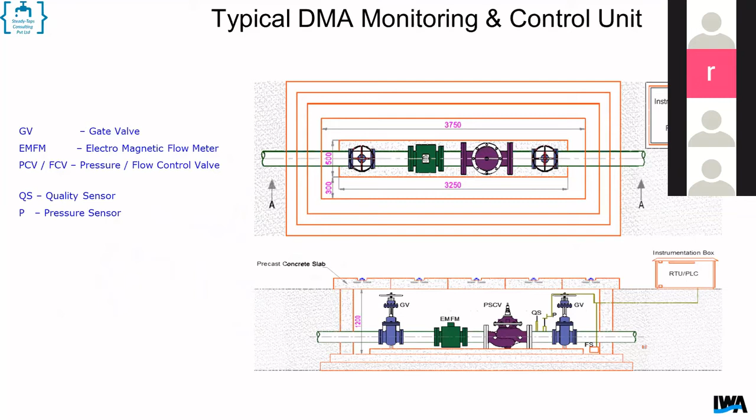So what we did in my earlier tenure was develop our own systems, because we need efficient, low-cost systems - we don't want to import things. So we developed these sensors and things. There are hundreds of people today doing it, and I'm also helping a few companies post-retirement.

We did this study for the smart city T Nagar. Unfortunately the water tender came out and it got dropped due to lack of budget - every conceivable technology in the world. T Nagar is the commercial place within the city of Chennai, just 7 square kilometers.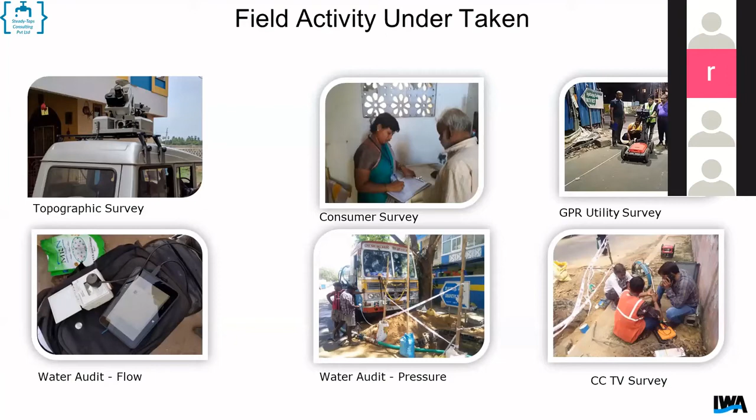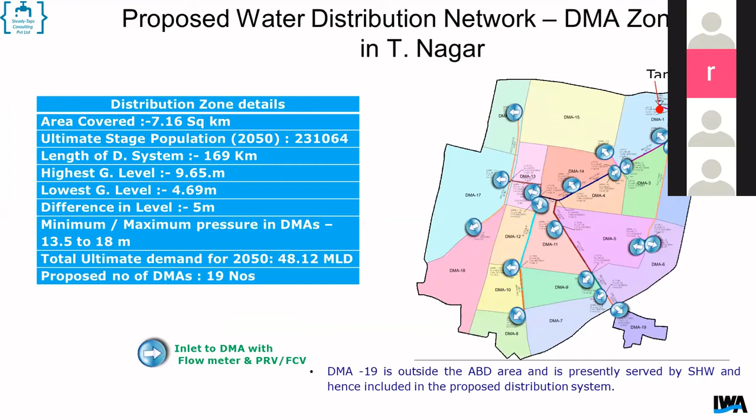We did this study and identified about 19 district metering areas, with pressures ranging between 13.5 to 18 meters at maximum, because there was a ground level highest-lowest difference, and the network was about 169 kilometers. So we divided it into various zones.

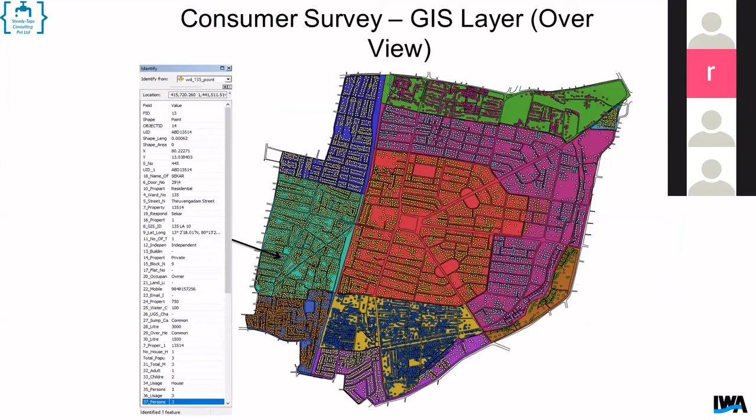We did GIS-based surveys of consumers, a LIDAR survey of the road, and leak detection to understand the condition of the pipe. People refused to believe it, because they said even at 2 meter pressure - right now it's only 2 meter pressure - water hardly fills into the sump. The losses are at 45 points.

And if you had to pressurize it, the smart city with less than 1 million population would have to deliver at 17 meter pressure. Just imagine what the leak would be - it will be double. So you can just imagine that is the reason we need to move away from it.

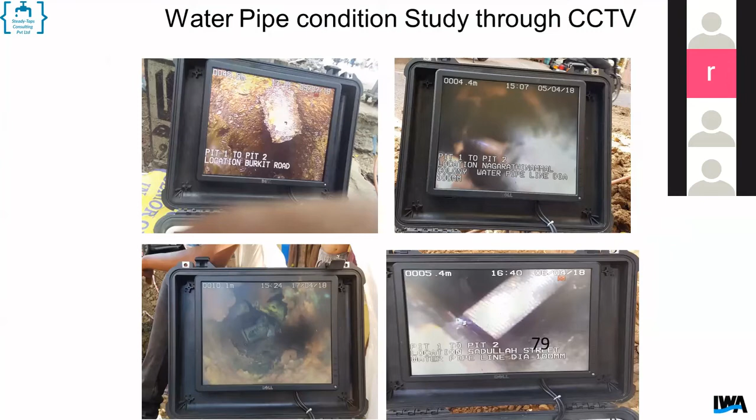Then we did a lot of underground investigation and found all the pipes were choked. First of all, flushing of the pipes - spending money on O&M for that will help us relieve the water and get the water supply working properly. We did CCTV surveys, and for the first time quantified the pipes as per international practice, because it's an old city - the installation started 70 years back, before the British era.

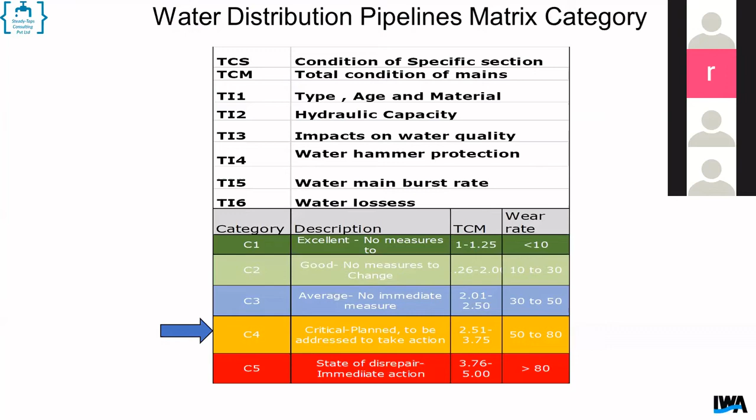This was also done as recently as 10 years back. We found that some of the older pipes, 70 years old, the condition was so good. We quantified the pipes in terms of C1, C2, as per international norms for repair - critically planned, average, or can live life some more. Out of the 170 kilometers of network, we said you only need to replace 18 kilometers, and if you do a program of DMA and metering at the consumer side, you will get your return on investment. Whatever the 100 crores odd you spend, you'll get it back in 18 months, it'll start paying for itself. Unfortunately, they couldn't get the budget and it got dropped.

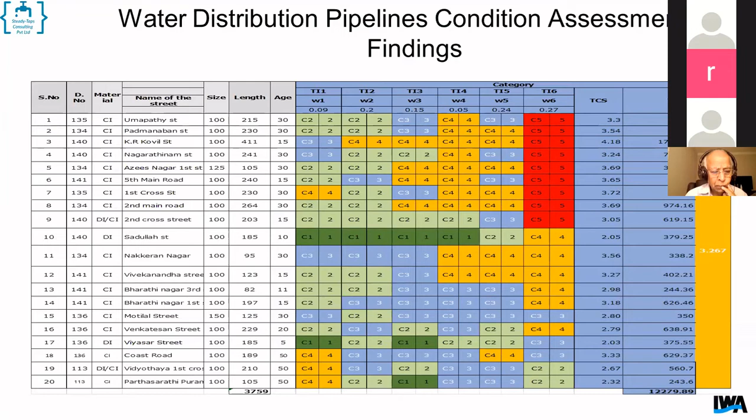Similarly, we have done Trichy - I did this in my tenure, and I believe this has now come out as a tender, which is due with CMA in the next couple of weeks. Thoothukudi is another area where we did the entire citywide NRW study for 4 lakh population over a period of 3 years, and we quantified it.

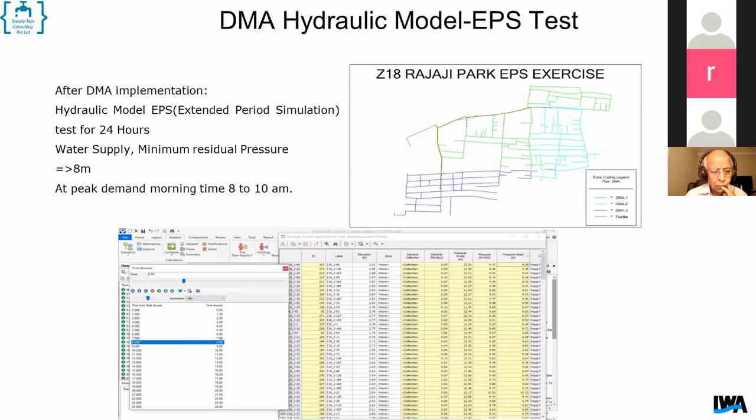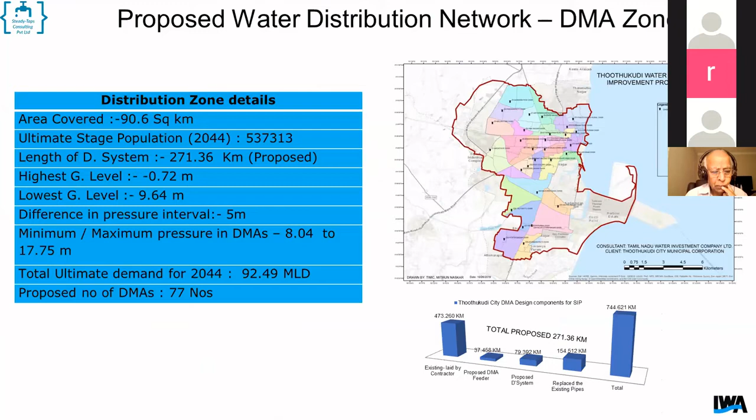These are what I have done and what I've initiated out of my passion. This business did not exist in TWIC before this - I did it in my company at that time. For an area of 90 square kilometers, we divided it up, and today they couldn't get budgetary support, but they are bringing it out in small pieces. There is now an order for DMAs and SCADA for about 60 crores and things like that, so that is now happening.

So the very important recommendation for me is that we don't even have to ape the Western world, which is very advanced compared to us - we won't even understand it if we sit in some of their conferences about how they do it. But at least in India, we can do something simple, it's not rocket science. We need to do survey, we need to do the modeling, we need to do the DMA design properly.

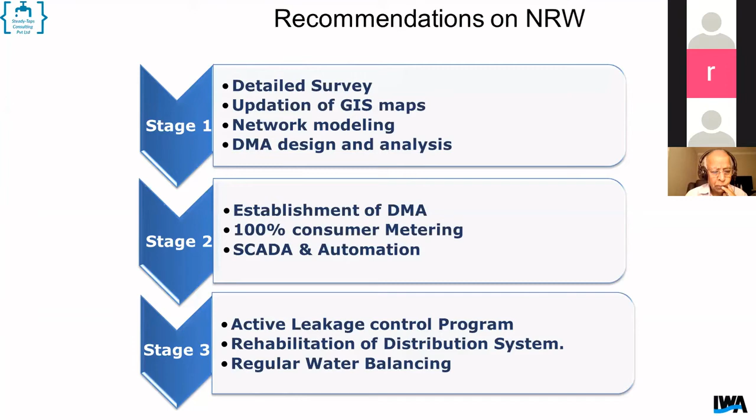Then establishment of the second stage was DMA, actual field work, active leakage control, and water balance. So it's very important to do all these initiatives as part of a reform agenda - topographical survey, GIS, pipe condition. I want to tell you, in India we are very poor in this, we do not even know. In the world over, there is something called free swimming technologies available - any large pipes above a certain diameter, they put in inline pipe condition monitoring. We don't do that in India.

So then we say this calculated risk will require replacing 40 kilometers, 80 kilometers, like that. Whereas, like T Nagar I showed, out of such an old network of 170 kilometers, we only have to replace 18 kilometers - very, very small. That's hydraulic modeling, and that too not in one stretch, but at different places across the city.

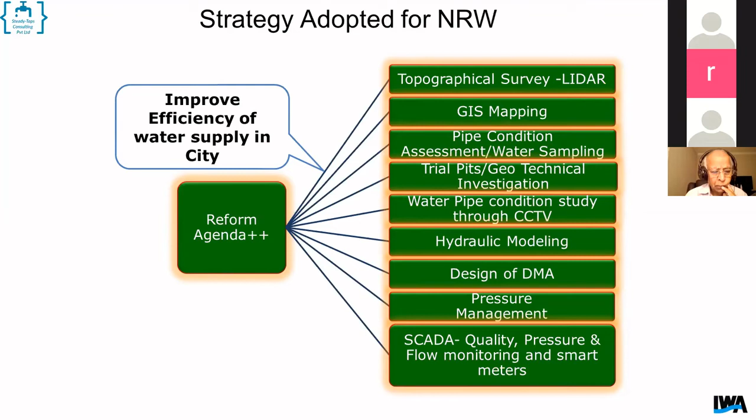So hydraulic modeling, DMA, pressure management, SCADA - it's very important to design the IoT-based system in terms of overhead tank control, district metering area. These are some of the areas I'm working on right now. I'm actually developing products using my knowledge of electronics combined with my past knowledge. So very quickly, you will see these types of products coming into the marketplace, I hope, and we are trying to do some small pilots of it.

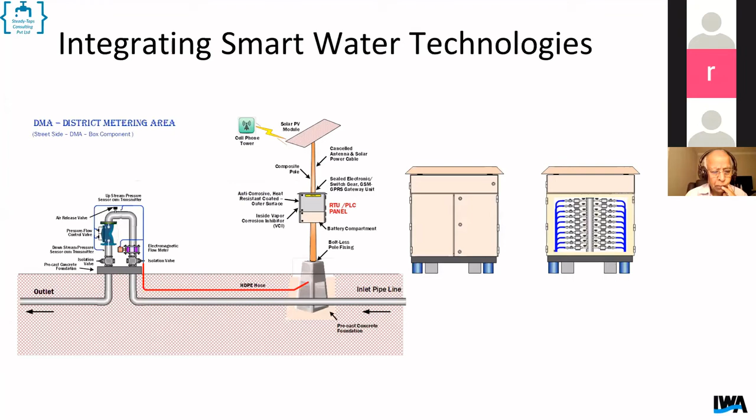Because typically, if you go for all these standard vendors, they are very, very expensive. And today, there's no realization of the value of water - it doesn't pay, and all of our authorities just say knock it off, saying there's no accountability in this. So I decided to do something grounds up and do it myself.

Very importantly, these concession models have been around for many years, but they have failed in the water system. Even my earlier company was a classic failure - we were a loss-making company in the red, then the government bailed us out, and we became extremely profitable over the last 5 years. But the private sector or people coming from outside don't have the risk appetite for our country - their ability to understand our baseline says that nothing exists. So today India is a very high risk country, and these concessions will not really work.

The lease contracts, which have been working for a very long time, simply provide service, but there's no accountability here. The contractor continues to do a bad job, but most of our water schemes in any state are let out to these small service contractors, and they spoil the system very badly. The bigger companies don't come up because it's too risky, or they charge high fees.

The management contract, which is being tried out now in various parts in some of the projects I mentioned, there is no utility still because of divided responsibility, and the turnaround time, you can't achieve everything in 5 years. It requires a longer term for a lot of unknowns. You have to get private sector investment and involvement in a big way, and that is very important. The government is not convinced with the efficacy of these management contracts at all.

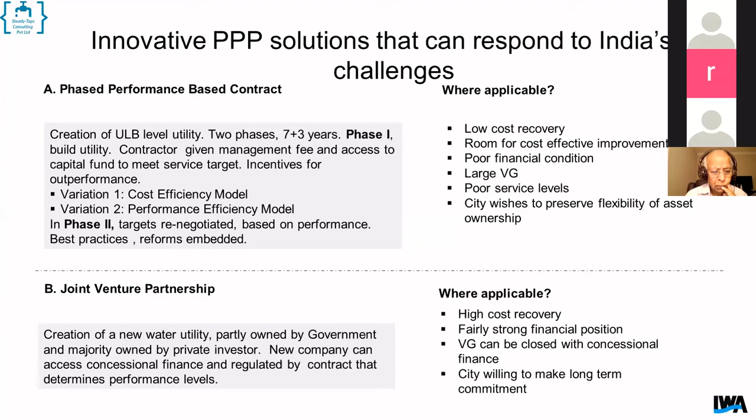So we could raise concessional finance and bail the company out, and that is what we say. The viability gap in funding can be closed, and the city is willing to take long-term measures in this. So if you really compare the traditional model and the performance-based model I've told you about...

Like people - L&T, Veolia, and Suez - are all doing this, but there are very few Indian companies coming forward. They are not able to do all these things, unfortunately. And Indians are so good in this. I don't know why we can't do it.

Building a utility is not specified in the traditional model; here it is mandated - you have to bring institutional and structural changes. Governance structure should be there. Performance indicators are very weak there, but here it's good, focusing on delivering households with 24/7 pressurized water. Capital efficiency is not controlled by the service contractor or operator, and generally the funds are not adequate and no incentive is there.

Here, the capex will be controlled by the JV company that comes in. Large fund infusion can happen, and strong incentives to maximize benefits could happen. Long-term sustainability is too short a period in the traditional model - normally these projects are only 1 year or 5 years maximum, which is slightly wrong. Here, incentive to do well is there, and motivation from the operator is there, to serve a growing market. Inadequate finance is addressed, whereas capex funds can be used and external funds brought in.

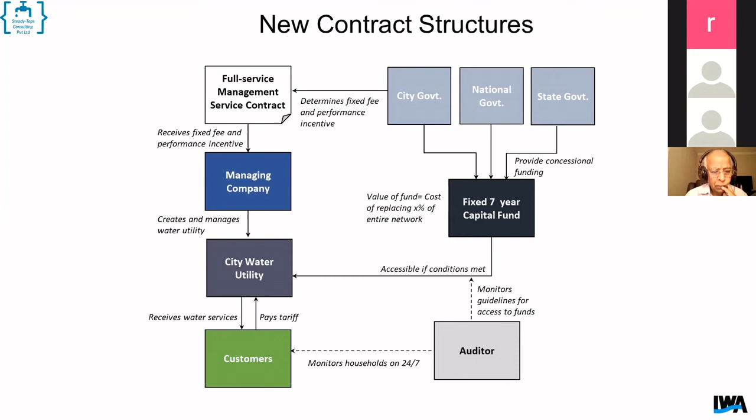So this is the model that is conceived - a full service company. You need to manage the company, and there would be a city water utility created by the government as a step-down company. Then you have the customers and you have the auditors, so that too much profit or tariff change is not brought in. Generally, you need to infuse capital as it comes in, and that is what I call a holistic approach.

And this is what I wanted to tell you this time. I hope, Jayan, I've kept to my time, or stretched a bit more - I do not know. But I think this brings us to the end, and if there are any questions, I'll be happy to answer them, sir.